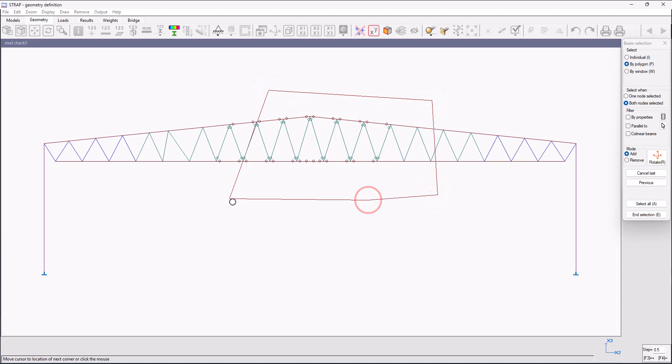Also, while using polygon selection from the menu, it is possible to specify the polygon vertices by left-click. There is no need to right-click and drag as shown before. After the selection has been made, the process will end immediately.

The Select When feature will allow us to choose how to select beams. We will be able to select beams by choosing only one node in each beam, or by choosing all of their nodes. For example, let's click on one node selected and select one node on each column by window. Now we can see that both columns have been selected.

The Select by Property feature will allow us to select beams with a specified property number. For example, by choosing this option, the program will prompt a window with all the property numbers, and we will mark yes only for the beams we want in the selection.

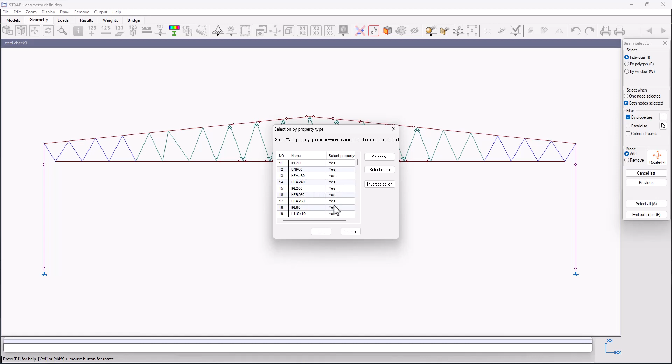The Parallel To feature will allow us to select only beams that are parallel to a specified beam. For example, let's choose this option and select a reference beam. Afterwards, a normal selection process will continue, and only beams parallel to the reference beam can be selected.

The collinear beam feature will allow us to select a line of beams simply by selecting one beam segment in that line. For example, let's click on collinear beam and choose one beam segment. Now we can see that all of the beams in that line have been selected. For each beam segment I will choose, all of the beam segments located on the same continuous line will be chosen as well.

The Add button in the selection menu is checked by default, which means every element we pick will be added to our selection. If we press on Remove, then every element we choose will be removed from our selection. In case we selected some elements by mistake, this tool will be efficient.

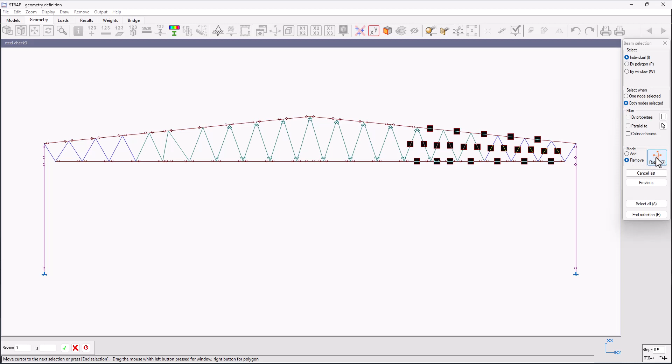It is possible to rotate the model by clicking on the rotate icon on the menu and holding the left mouse button to rotate the model. After rotation, click on the right mouse button or on End in the menu to get back to selection.

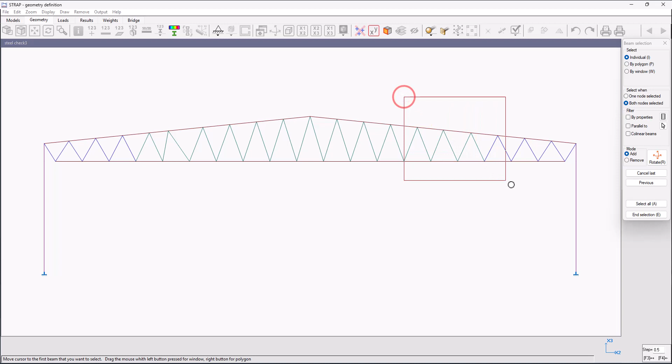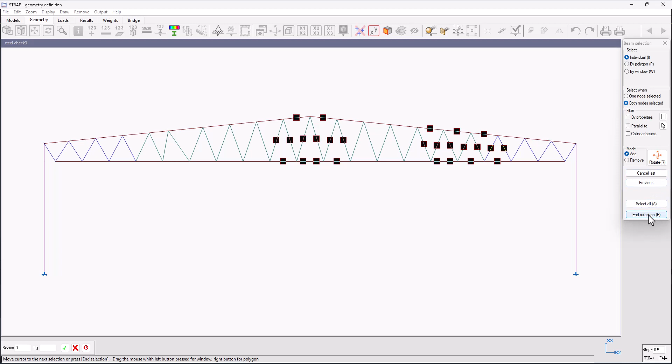The Cancel Last feature will allow us to cancel the last selection groups made during the selection process. For example, let's select 3 beam groups and 1 individual beam. By clicking on the Cancel Last option, we can see that the individual beam has been removed from selection, and if we press on it again, we will see that the beam group that has been selected before the individual beam has been removed from the selection as well.

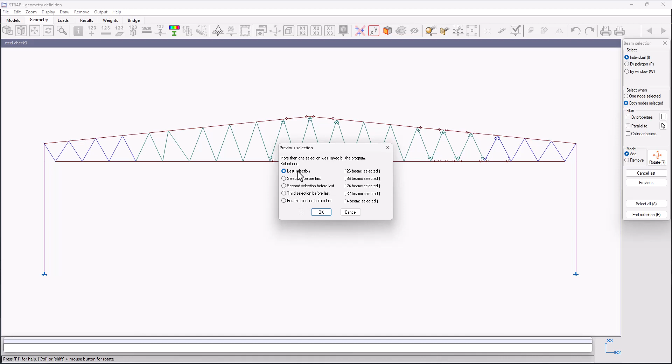The last feature regarding beam selection is the Previous Selection option. It is possible to select one of the last 5 previous selections made. We can select all of the beams in the model by pressing on Select All or pressing the A key on the keyboard. For selection of nodes, elements, walls, and slabs, most of the features shown before are identical in nature. We will now present the unique features relevant for each selection group.

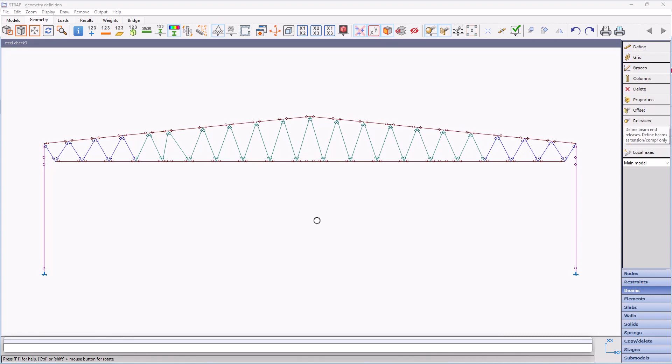For node selection, it is possible to limit the selection to the restrained nodes only. For example, to change all the fixed restraints to pinned ones, we will select Restrain Only and press on Select All. We can see that only restrained nodes have been changed.

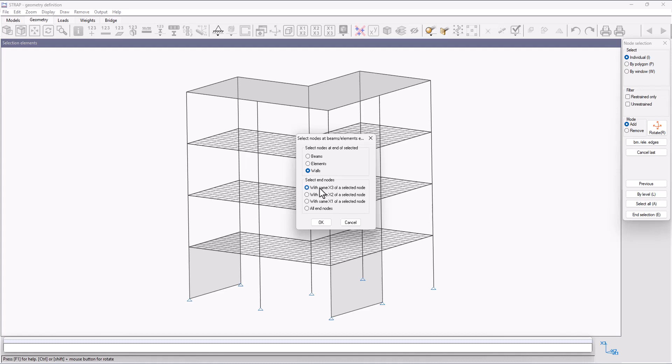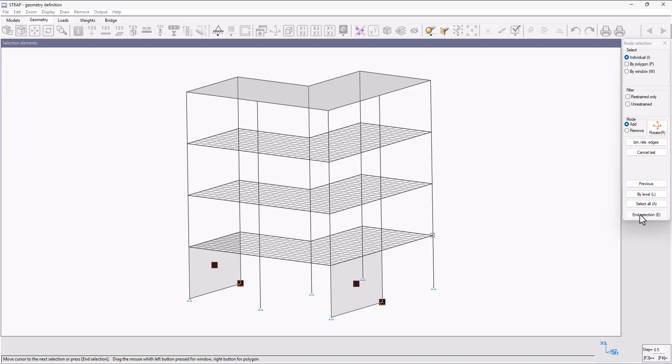The Beam/Element Edge feature will allow us to select nodes located on edges of specified beams/elements. For example, to change the pinned nodes at the bottom of the walls to fixed ones, we will click on Beam/Element Edge, select Walls and End Nodes with same X3 coordinate, and click OK. Afterward, we will select the desired walls and the reference node. We can see that the restraints were applied only to the bottom edge of the walls.

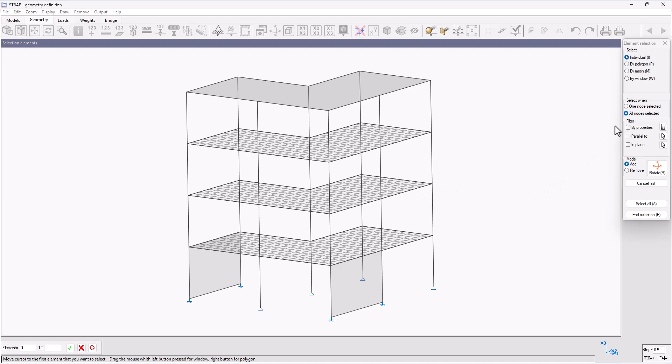In element selection, it is possible to select elements by mesh. We can select element mesh, which was defined by the mesh command. After choosing this option, by clicking on it or pressing the M key, all defined element meshes in the model will be presented to us. Choosing only one element on a mesh will select the entire mesh.

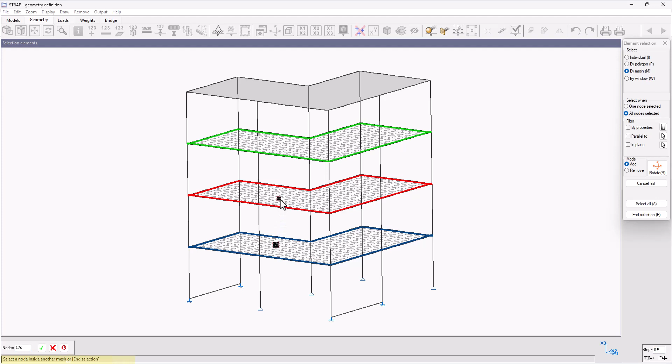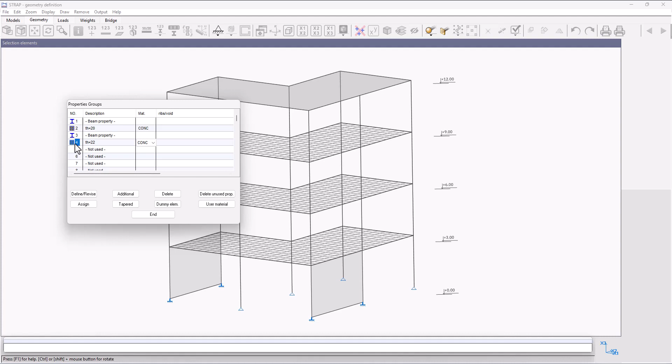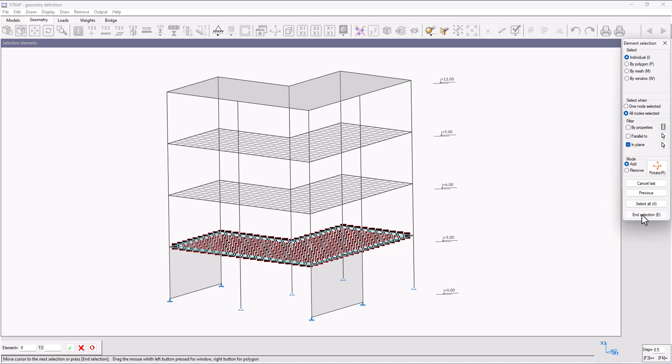The in-plane feature allows us to select all elements located on a selected plane. For example, let's change the property for all the elements located on +3 level. Choose the desired property, press on Assign, pick the in-plane feature, select the reference element on the desired level, and select the whole model by a window. We can see that only elements on +3 level were selected, and if we display the elements by property number, we can see that the property number has changed.

Using all the features shown in this video, the selection process, which is a very common process, can be done easily, quickly, and efficiently. Thank you for watching.